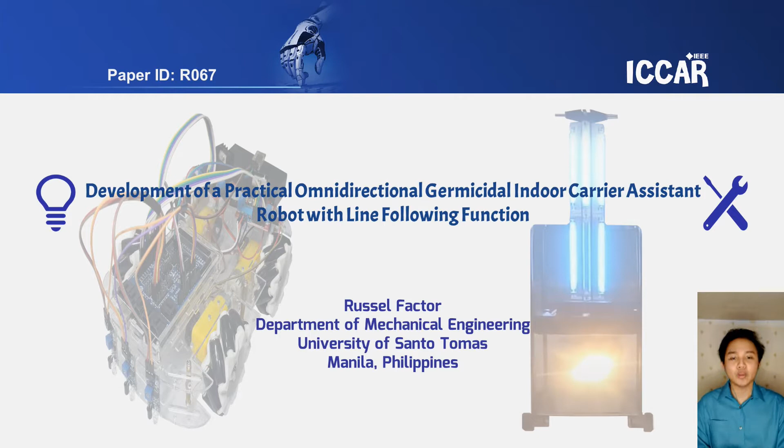I am the corresponding author of the research entitled Development of a Practical Omnidirectional Germicidal Indoor Carrier Assistant Robot with Line Following Function, with a paper ID of R067.

So first off, the statement of the problem. The COVID-19 pandemic has been a major public health problem globally. Frontline workers or medical practitioners are more vulnerable to diseases as they were exposed to their workplaces. Furthermore, indoor spaces where people are in close proximity are at high risk of acquiring the disease.

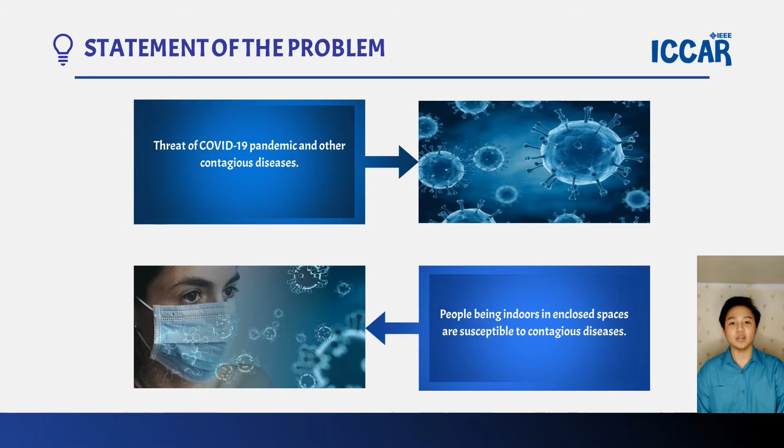In this time of crisis, indoor assistant robots play a role in providing aid to healthcare workers. Thus, the authors have proposed a solution for the aforementioned problems: a mobile robot that can navigate in indoor facilities to carry disinfecting apparatus such as UVC light. As shown in Figure 1 is the 3D CAD model of the overall design idea.

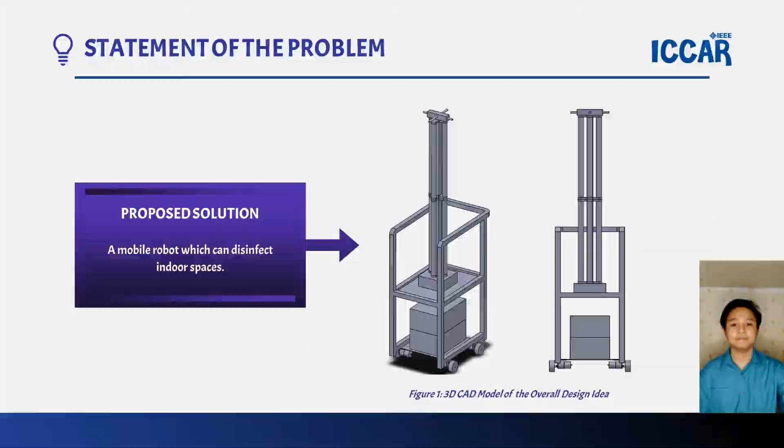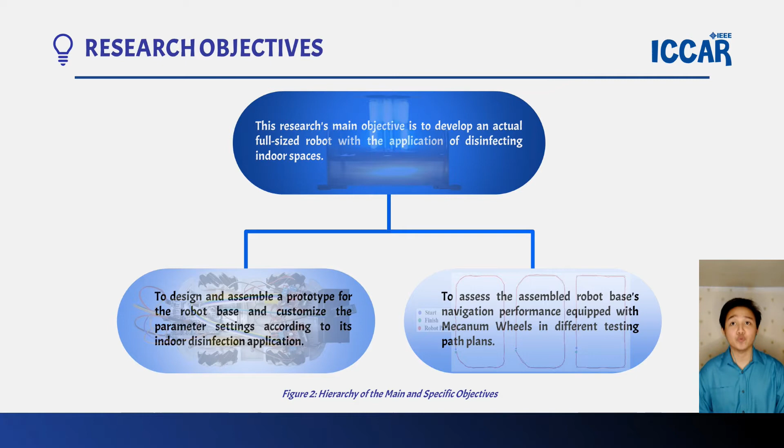This research's main objective is to develop an actual full-sized robot with the application of disinfecting indoor spaces. Specifically, this research would like to work on the following: to design and assemble a prototype for the robot base and customize the parameter settings according to its indoor disinfection application, and to assess the assembled robot base's navigation performance equipped with mecanum wheels in different testing path plans.

Once the authors deliberately assess the prototype through a series of tests and evaluations, the derived concepts and findings can be used for the implementation of an actual disinfection robot equipped with UVC lights.

Germicidal indoor assistant robots will benefit commercial establishments in dire need of a thorough disinfection procedure. Thus, the helpful machine will provide a safe working environment for frontline workers. The study's acquired valuable information will benefit researchers and students interested in pursuing and continuing similar studies. Also, it can potentially inspire and increase the interest of Filipino youth towards robotics.

The study focuses on developing an indoor assistant robot that navigates a room autonomously and remotely, with a specific task of disinfection. As part of a more significant effort in developing a service robot to disinfect, the authors only focused on improving the design, automation, controls, and disinfecting feature it can offer to provide a safe working environment by maximizing the use of accessible resources.

Due to limiting factors such as the COVID-19 pandemic, the authors conducted experimental assessment at the comfort and safety of their homes. The authors did not include testing the effectiveness of the disinfecting properties of UVC light to various disease-causing pathogens. The robot's line follower function will only be limited to a black line and light surfaces to ensure precise and accurate navigation.

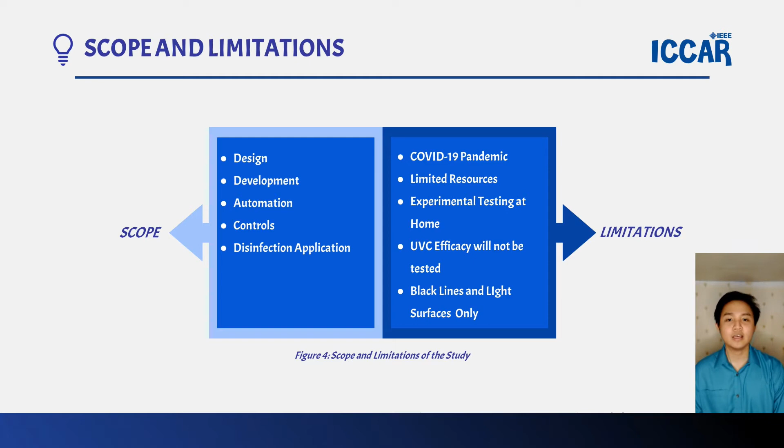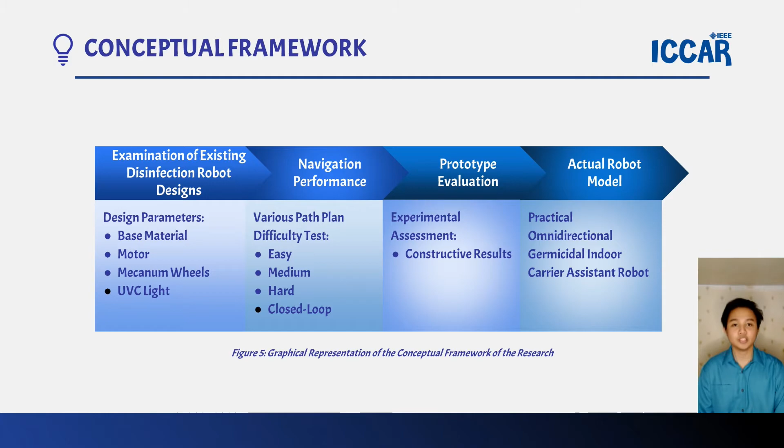This is the graphical representation of the conceptual framework. Together with other parameters, these concepts are considered in the design and development of a mobile robot. A simple hardware, software, and control system was used as a tool for research and study. The base machine used was a four-wheel drive equipped with mecanum wheels as shown in Figure 6 and 7.

Three IR sensors were installed on the front of the robot. These sensors allow the robot to compare black lines on a white surface and vice versa, thus following a line autonomously. The robot can also be controlled manually using an integrated Bluetooth module.

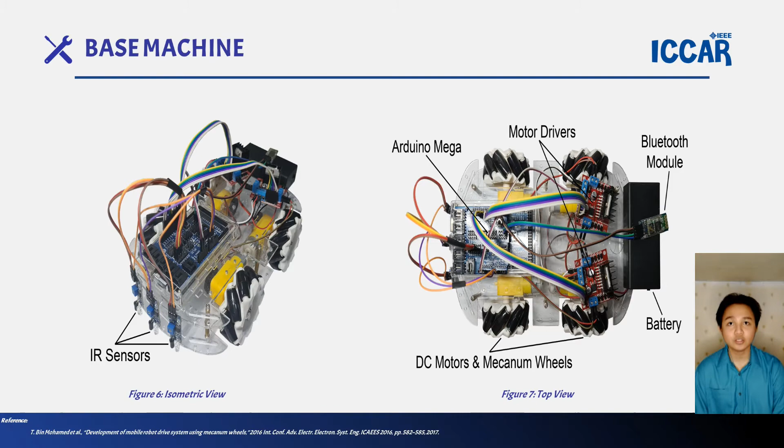The rubberized external rollers attached to the whole circumference of the mecanum wheels, angled at 45 degrees, provide the robot the capability to move in different directions while maintaining its original orientation.

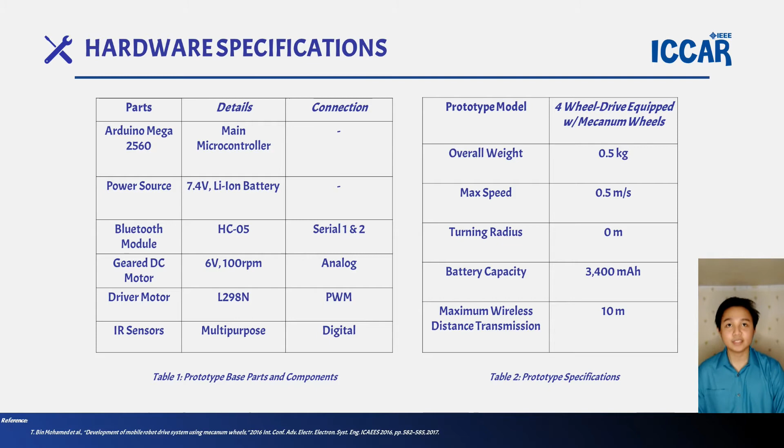The overall weight of the prototype is 0.5 kilograms, max speed of 0.5 meters per second, turning radius is 0, battery capacity is at 3,400 milliamp hour, and the maximum wireless distance transmission is capped at 10 meters. The overall system architecture of the robot prototype is shown in Figure 8.

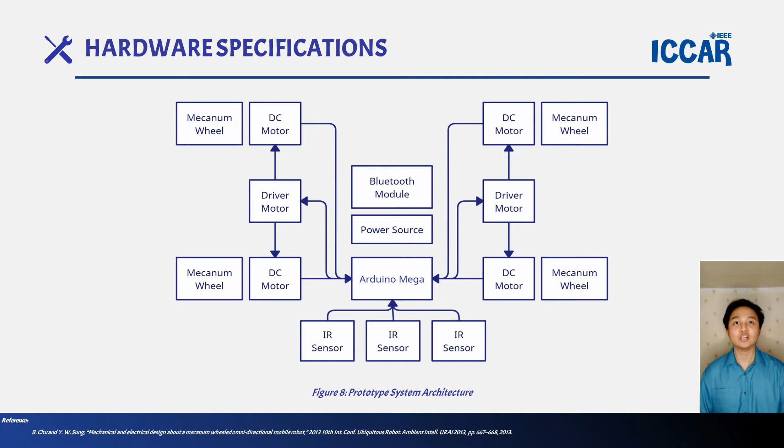The Arduino Mega 2560 serves as the main microcontroller for the comprehensive system that sends PWM commands to the geared DC motors based on sensor signals. Four independently controlled and driven mecanum wheels were connected to separate ports of the L298N motor driver. These parts operate together to perform a specific function for the prototype to navigate the desired path.

The line-following navigation model is shown in Figure 9. Mecanum wheels allow the prototype to navigate effectively in any desired direction. The robot's navigation and steering capabilities can be controlled manually using an Android application connected to the HC-05 Bluetooth module.

The working program diagram of the base prototype following the embedded black line is shown in Figure 10. The IR sensors will first read and detect the black line of the desired path plan. If a black line comes into close proximity of the reflective surface, the microcontroller will send commands to the motor driver to maneuver accordingly with respect to the desirable track pattern.

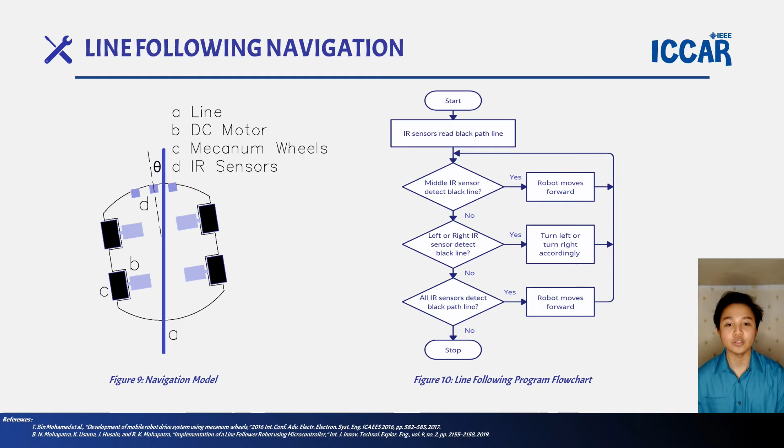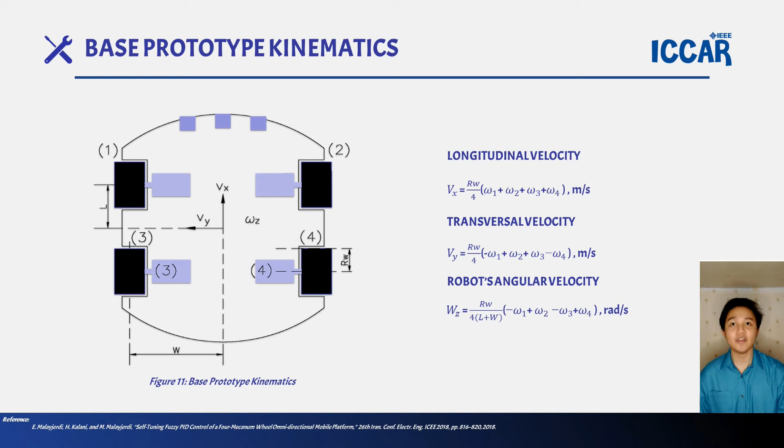The kinematic model of a four-wheel drive omnidirectional base prototype is shown in Figure 11. The inverse kinematic equations determine each DC motor's required angular velocity to direct the mecanum wheels into desired motion. In contrast, forward kinematic equations will locate the base prototype's path from the motor's rotational speed. The authors use the acquired values from these derived equations in coding and programming the microcontroller.

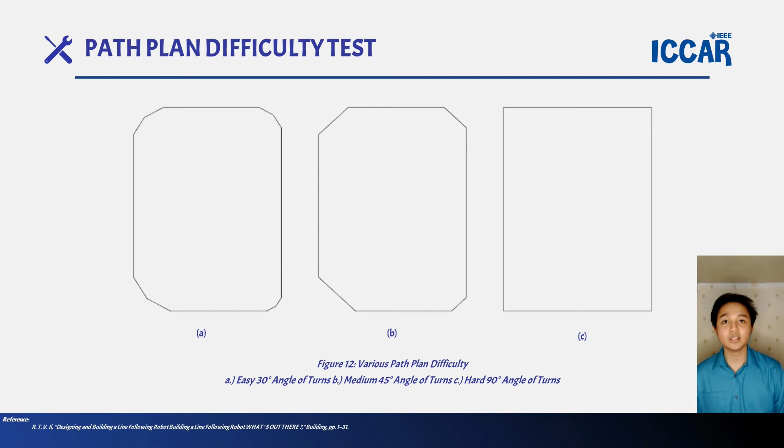For the navigation performance of the prototype, the authors created various track patterns. The first path consists of 30 degrees of turns. For the second, it consists of 45 degrees of turns. And the third path consists of 90 degrees of turns. The difficulty levels were categorized as easy, medium, and hard.

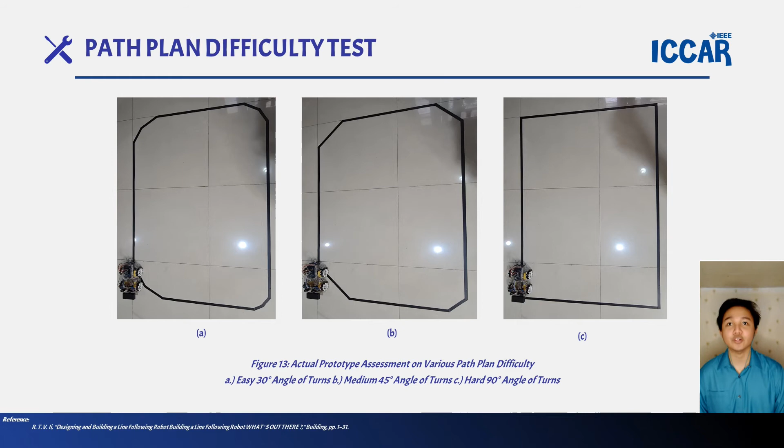After the initial testing, precise fine-tuning and calibration were done to the prototype. The subsequent performance assessment is done through a closed-loop test, where the prototype must overcome a much more demanding path plan, as shown in Figure 14. The results of the closed-loop test are shown in Table 6. The robot was successful in navigating from starting point to finish.

The test only focuses on the line follower function because it executes the command with precision and accuracy. It also follows the line without any delays in comparison with the remote-controlled function. The results and analysis of the data gathered will be used to design and fabricate the actual service robot model.

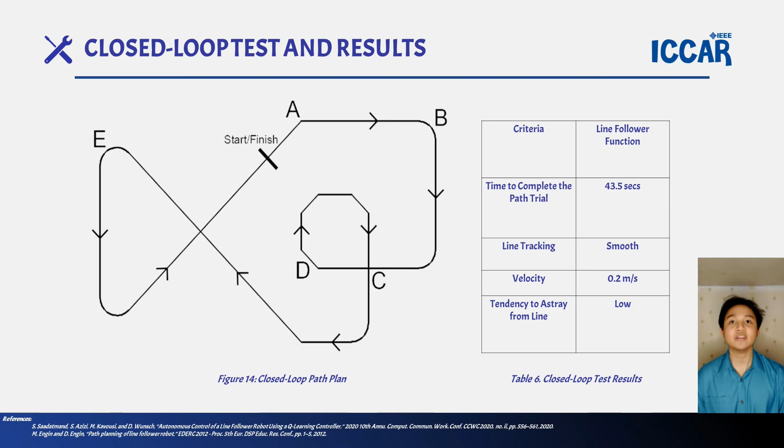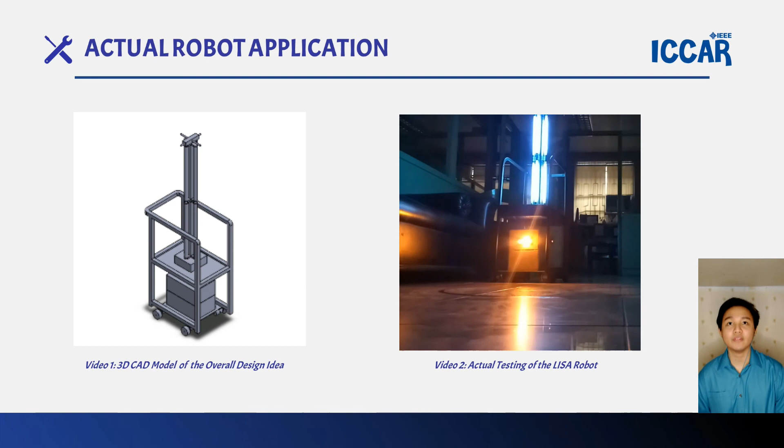A full-sized robot, named LISA or Logistic Indoor Service Assistant Robot, was developed after a series of successful performance evaluations of the prototype. The LISA robot was used during the first surge of the COVID-19 pandemic and was tested in different office facilities and corridors of the University of Santo Tomas, Manila, Philippines, as demonstrated in video number 2.

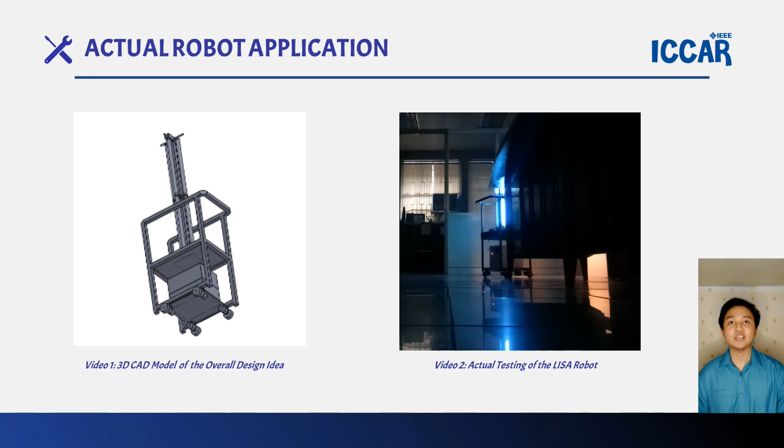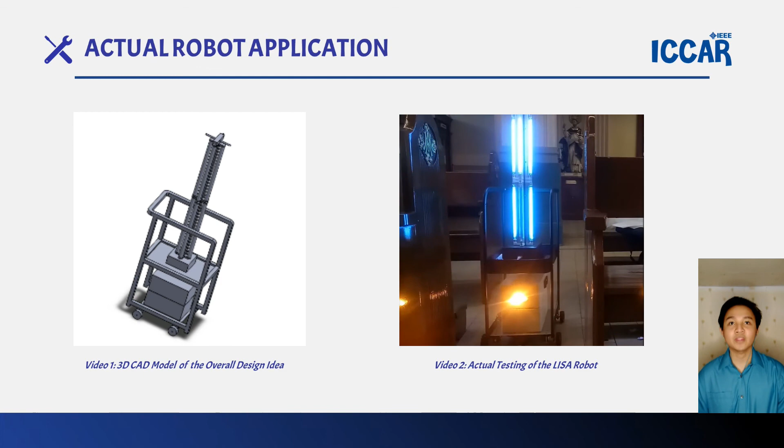It was designed to carry disinfecting UVC light and navigate around an empty room by following a black line embedded in the floor. The LISA robot can also be controlled remotely using a Bluetooth controller. Four independently driven mecanum wheels were installed to allow the LISA robot to maneuver in tight locations.

The authors successfully developed and assessed a base prototype of an omnidirectional, germicidal, indoor carrier assistant robot with the line following function. The authors tested the prototype's navigation performance on various track patterns and a demanding path in the closed-loop test. In designing a course for the robot to navigate, a 30 to 45-degree angle of turns must be considered to ensure smooth and precise line tracking of the robot.

Thus, the results and observations highlight specific areas of improvement to perform proper calibration and accurate fine-tuning. The authors used the concepts derived from the prototype to design a full-sized LISA robot. It was able to navigate in indoor facilities carrying disinfecting apparatus such as UVC lights.